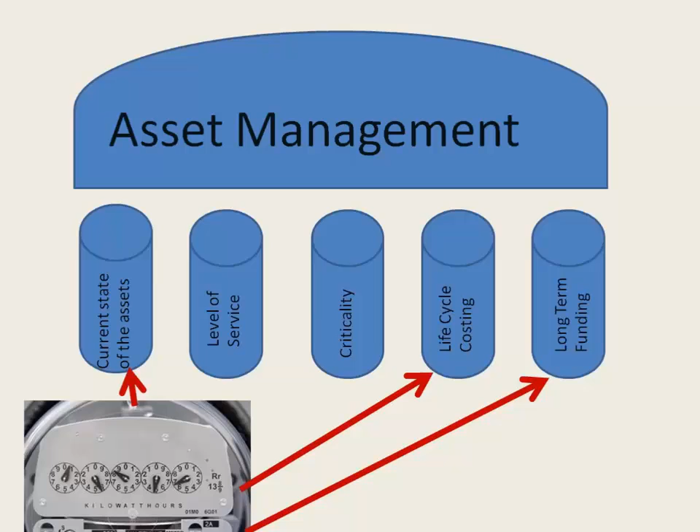One of the things we do as well is energy efficiency, and energy efficiency ties very directly to asset management. As you're doing your asset inventory during the current state of the assets, you'll collect information about the energy use of your assets. Then when you get to the life cycle costing segment, determining what you want to do when you want to replace an asset and what you want to replace it with, energy efficiency comes back because you're going to look at whether you want to replace an existing asset with something that may be more energy efficient. Finally, energy has a big impact on the funding required because energy is oftentimes one of the most expensive components of your system.

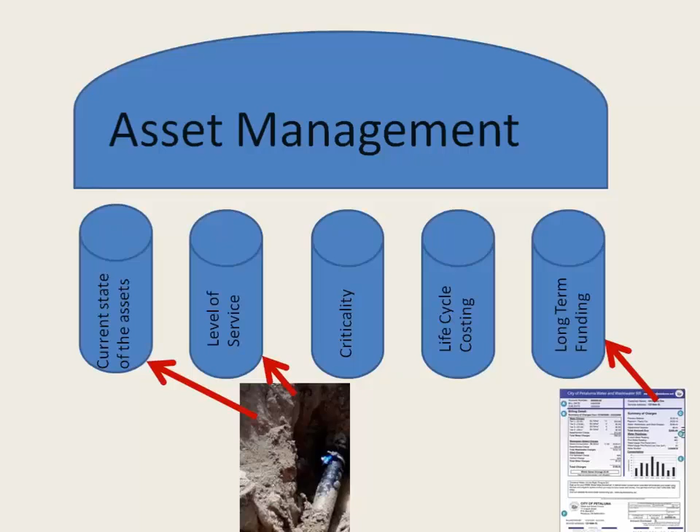When we get into water loss, which we are also going to talk about today, that has a direct impact on the condition of the assets, which is part of our current state of the assets. It has an impact on level of service because we may set goals for how much water loss we will find acceptable. It also has an impact on funding because if we're producing a lot of water that we're not selling, we have an expense, but we're not receiving the revenue from that.

Another very big aspect of our work is rates and fiscal planning. Much of the revenue for water systems comes from fees and charges to users, so it's very important to know how to set those rates because that will have a big impact on the funding available to do all the other parts of asset management.

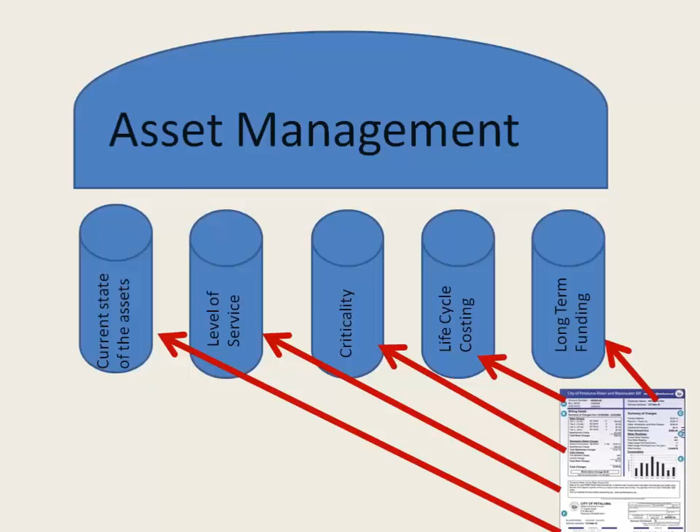Finally, I'd like to talk a little bit about water system cooperation. When water systems work together, it can help them in a lot of different ways, and cooperation can be anything from just talking to each other up to sharing operators or bookkeepers, sharing management, to the other end of the spectrum being actually interconnecting with somebody else and forming a new water utility.

If systems use cooperation just to help work through asset management alone, it can help you get through all 5 core components. You might not have any other connection with the system, but you might want to work with them and say, let's work through an asset inventory together, or let's look at how you set level of service goals. So look to each other to help out in that area.

Energy efficiency and water loss are very directly connected as well. When we produce water that's leaking out of the pipe, we have to use energy to produce that water. So if we can cut down our water loss, we will cut down our energy use.

Energy efficiency and water loss management are the two most controllable costs that go into our rates. So if we can reduce those costs, it can help us by allowing us to have money for other things, or help us out with the rates.

Small systems don't really have the economy of scale that a bigger system has. So it's important for us to look for ways to achieve that economy of scale, and one of those ways is by working together. I mentioned several ways that systems can work together. If you find a way to work together, it can help you reduce your overall cost.

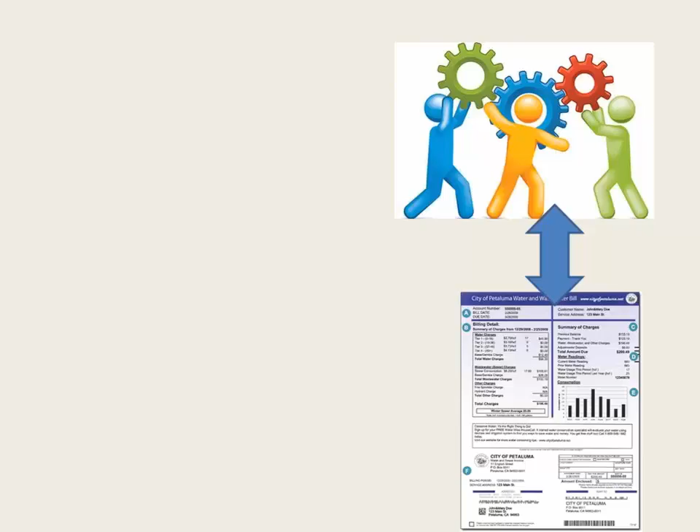So back to today's topic. Today's topic, we want to look at aging infrastructure with specifically a focus on the impact on water loss.

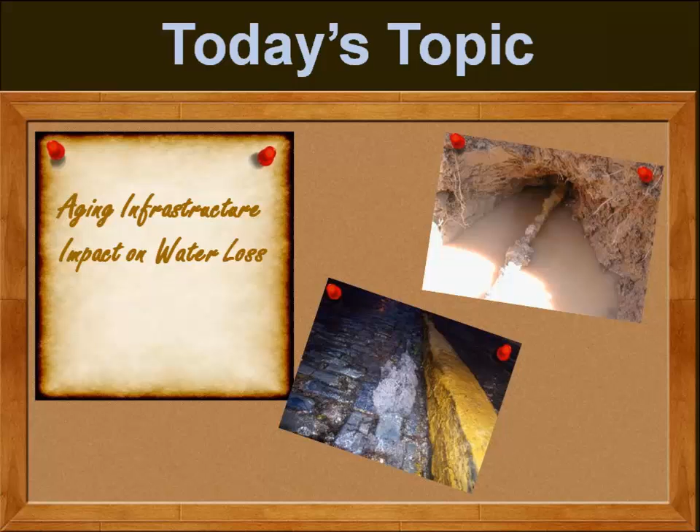So a quick review of webinar 1. What do we want to think about when we're talking about aging infrastructure? One of the things that we talked about last time, which is very important, is what do we really mean by the term aging. We want to get away from the thought that all we're talking about is how old a specific asset is, because age is but one factor that determines the condition of an asset and what you want an asset to do.

So we really want to get beyond that and think of aging infrastructure as really when our assets are starting to reach the end of what we call our useful life. And we'll talk a little bit more about useful life in a moment.

We want to look at our systems not as an entire combined holistic system. In this case, we want to look at individual assets and how those individual assets are performing. So again, when we get to our useful life, we want to look at the useful life of individual assets and not looking at a whole system, or even a class of assets together, like all hydrants, because they're not all going to act the same or last the same amount of time. So we really do want to get down to individual assets.

We want to think about all of our asset classes. Oftentimes when we think about aging infrastructure, it's discussed in the context of just our piping assets. We really want to think about all of our assets, vertical and horizontal. Horizontal assets are those assets in the field, like your pipe, your hydrants, your tanks. And vertical assets are those that are your pumps, your wells, your treatment units. We want to think about both of those.

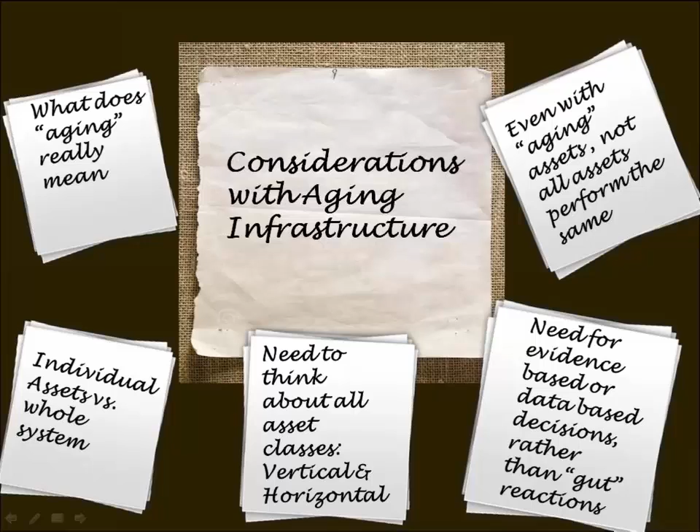Getting back to useful life, what we're trying to say is how much longer can that asset remain in service and deliver what we want it to do. The kinds of things we think about are the condition of the current asset, what it's made of, how it was manufactured, the maintenance history, usage history, etc. All of these things go into having a guess as to what the useful life is, and it will be our best guess because we never can know exactly to the moment when an asset is going to fail.

We want to do a best guess of what that's going to be, and we'll tie it to risk. If it's an asset that's very important to us, meaning the consequence of its failure would be pretty high, and the probability of failure is pretty high, it's something that would really cause us significant problems, we might underestimate the useful life. Instead of guessing 50 years, maybe we make it 45 or 40 years because we don't want that failure to occur.

If, on the other hand, the asset really doesn't matter, if it fails we can fix it, it's not a huge problem, then we would maybe stretch the useful life a little bit longer. So instead of saying 50 years, maybe we go 55 or even 60 years. We're making these estimates, our best guess based on all the information we have available, and maybe we'll be a little more conservative if it's a high-risk asset and a little less so if it's a low-risk asset.

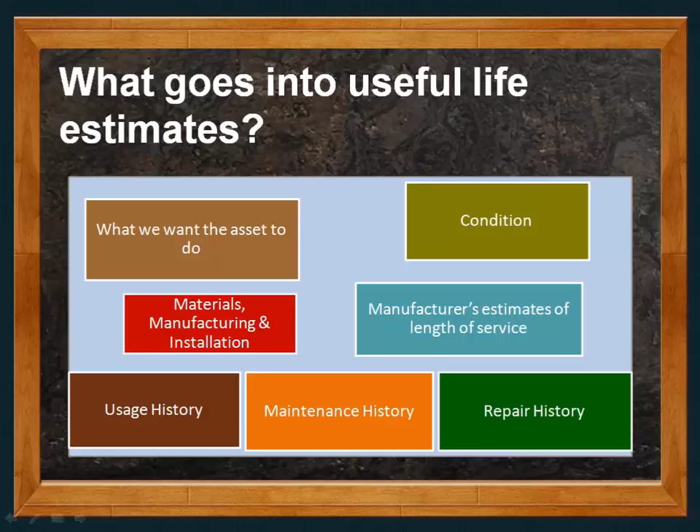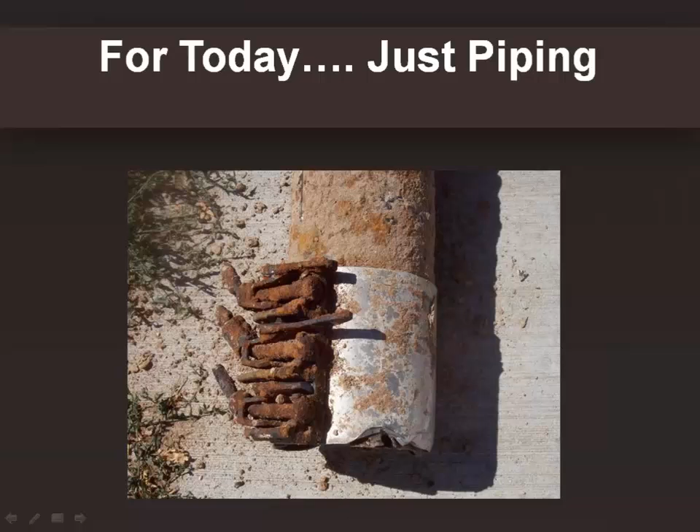For today, we want to concentrate just on our piping system and just looking at distribution piping. So I'll bring back this useful life estimate of piping, and what we're going to talk about is two things. One is what we want the pipe to do, and the other is all the rest of this stuff and how that impacts the degradation or aging of the pipe.

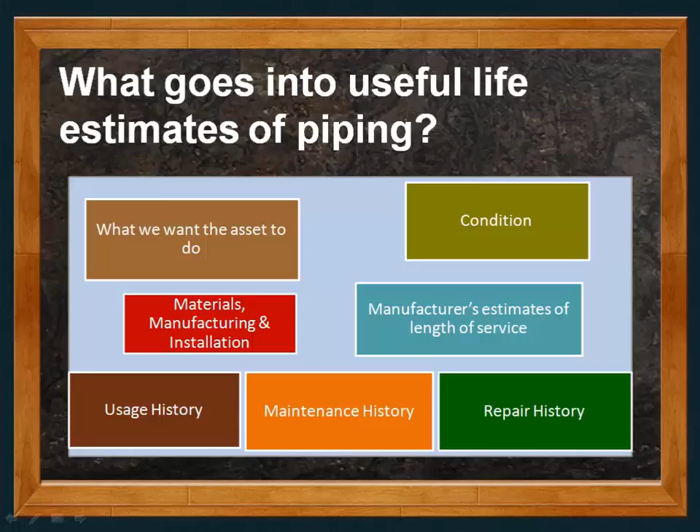So when we have pipe, what might we want that pipe to do, or how might we want to set a level of service for our pipes? We might want to look at things like the number of breaks per mile, or the number of breaks per segment, however you want to break that up. We might want to have a value and say we'll accept this many breaks per mile or per segment, but we really don't want any more, and if a pipe reaches that level, maybe that's the point where we need to replace it.

We might want to look at things like the number of service interruptions, either per customer or per year, to see how much we're shutting people off. We might want to look at the amount of real water loss and set a value saying we're only going to accept so much water loss. We might want to have a number of catastrophic breaks - meaning not just water flowing down the street, but something that causes a lot more problems, like a major sinkhole, a road collapse, or a problem for a business. So when the break has a much bigger problem than just a typical main break where some water runs down the street and we can fix it.

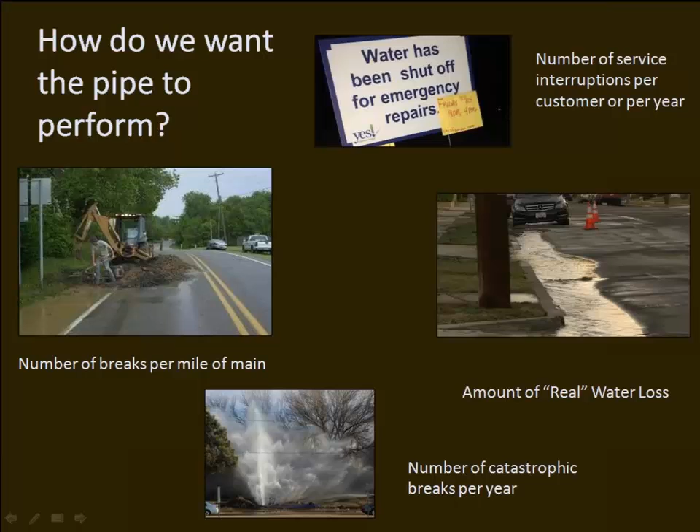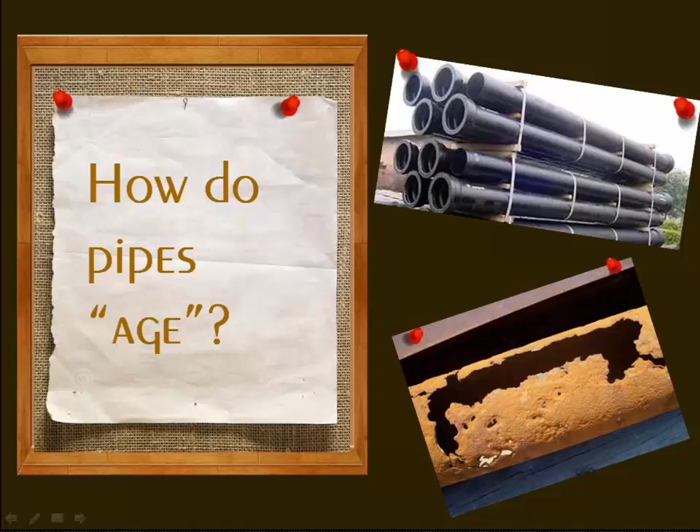All the other factors I'm going to lump into: how do the pipes age? How do they degrade? How do we get from a brand new piece of pipe to one where there's been a lot of degradation, holes, missing pieces of pipe? How do we go from one state to the other? There are a lot of factors that go into that, and I've separated them into three different categories. The first category being physical.

The major factors affecting deterioration are age, length, material, diameter, manufacturer, joint type, the vintage, lining and/or coatings, how deep the pipe is buried, installation, and wall thickness. So all of these physical factors that make up the pipe will affect its deterioration.

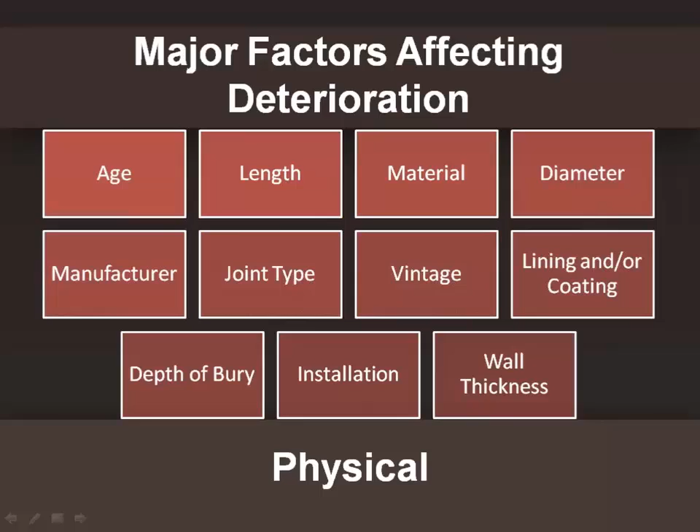The next is operation and maintenance: the break history, cathodic protection, whether you've protected the pipe, and water quality inside your pipe. Repair and rehabilitation methods, the flow velocity through the pipe, what kind of O&M you do, like do you do any flushing of the lines, do you do any cleaning of the lines, how are you operating your hydrants? Is there any water hammer if somebody's not doing it properly?

And then finally, the internal water pressure. What is that pressure inside the pipe? And does it vary? Is it something that goes up and down a lot, or is it pretty constant?

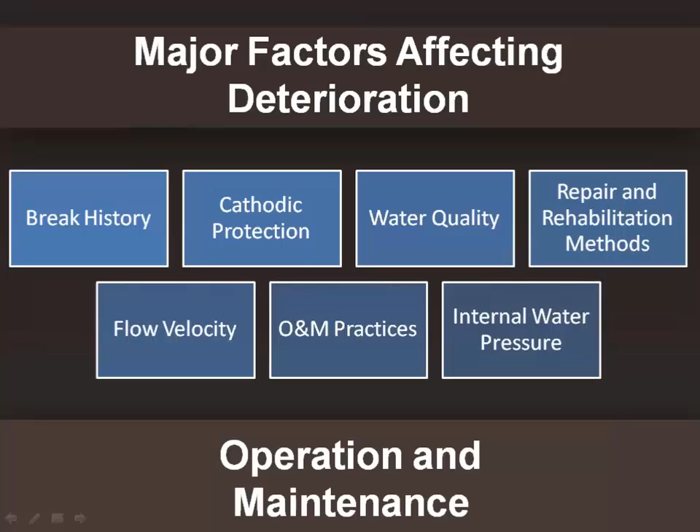And then environmental factors. These are the things affecting the pipe from the outside: the surrounding soils, frost, traffic loading, and the quality of water outside the pipe. So if this pipe is subjected to groundwater, what is the quality of that water? The bedding that's under the pipe or the backfill above the pipe.

If there's any stray electrical currents from other utilities around the pipe, if there's any underground disturbances, meaning construction going on near the pipe, and finally, the climate it's subjected to. Like here in Albuquerque, where I am, it's desert conditions, relatively mild. If you're up in Buffalo, you're subject to very cold and snowy. If you're in Washington State, different climate. So all of these factors add up to affect the pipe.

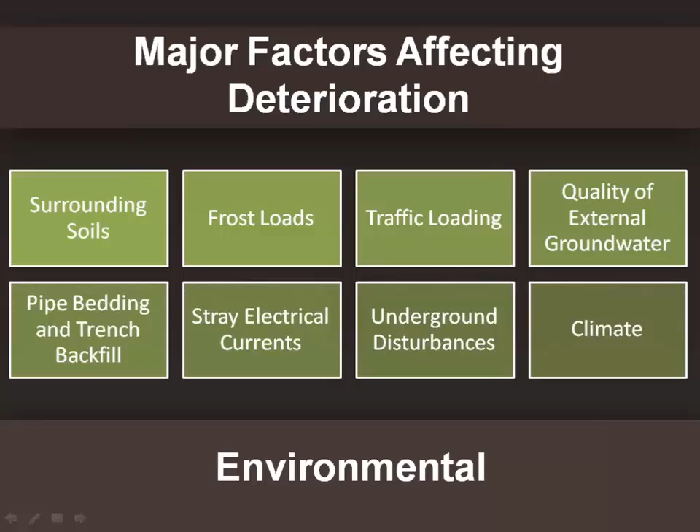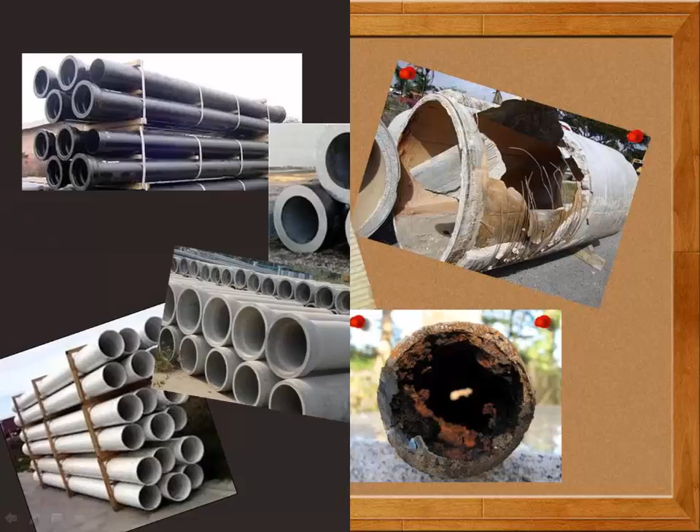And furthermore, within your system, each individual piece of pipe is going to be subjected to different conditions, so that's going to affect how individual pipes deteriorate. The deterioration can be internal or external or both. The forces acting on the outside of the pipe can have it degrade from the outside in, or the forces acting on the inside of the pipe can have it degrade on the inside out.

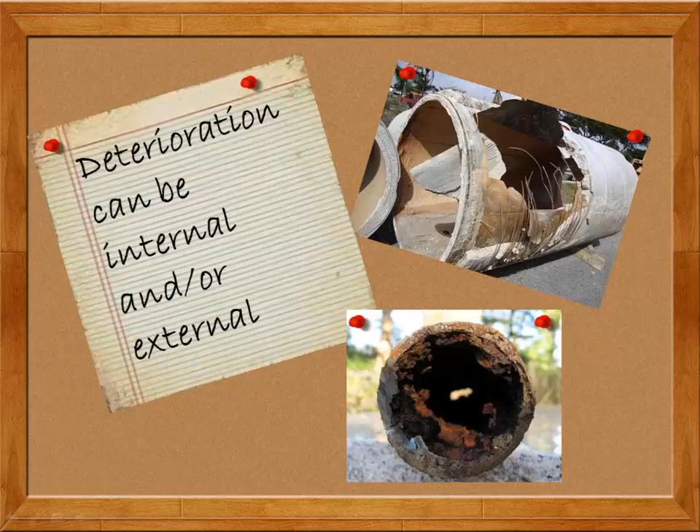The problem is that we don't really have a good way to determine the condition of this underground infrastructure. It's not possible for us to see inside and outside the pipes all the time. We may get a glimpse of a pipe during a repair, but generally speaking, we don't really get to see the inside of our pipes or the outside of our pipes.

As we just discussed, there's a really complicated mechanism for deterioration - all of those factors that act on a pipe. So it's very complicated to figure out how each of those factors is going to affect the pipe. And the deterioration is very site-specific, and it's hard for us to study it in situ, meaning in actual ground conditions, because it's hard to see what's actually happening. So for all these reasons, it's not that easy to determine the actual condition of your underground infrastructure.

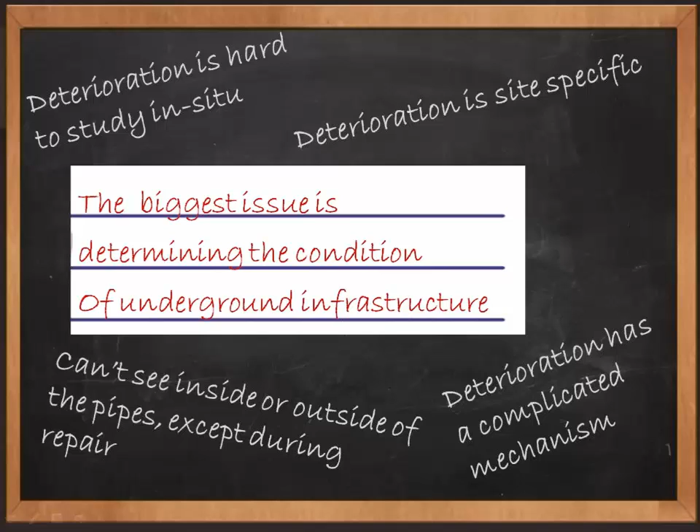There are some technologies that will help us get a better picture of what's going on in our pipes. There are several of them. Some are devices that you put inside a pipe, and some are devices that stay outside the pipe and you just hit a connection point, and you can figure out different things like wall thicknesses. Some can take videos of the inside of a pipe. Some can check for leak noises or look for leaks.

The problem is these technologies tend to be pretty expensive to deploy. They take skilled workers to put them in. They take a group who can analyze the data. Sometimes you have to build insertion points to put the devices in the system. So one issue is that for very small systems, this is not going to be something that you're going to want to do because it's going to be too expensive.

The results are also dependent on the technology you use, so you'll get different results depending on what technology you use. It's not like all of the technologies provide you the exact same data - some do different data than others. And then there's converting the results into actionable information. So once you know the condition from this evaluation, what do you do about it? How do you translate that into exactly when you should replace the pipe? Sometimes that's not as easy as we would like.

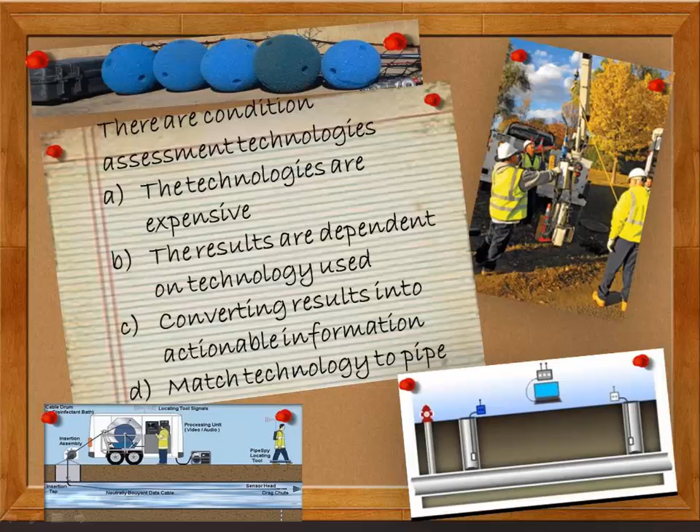So if we don't really have a way to get inside the pipes and find out what's going on, what else can we do? A lot of what we're going to do is rely on the past performance and use whatever we know about the pipe, things like size, type, diameter, depth of bury, and the other factors we talked about in the first couple of slides. We can know soil characteristics too.

So what we want to do is really get good information. Every time a pipe break occurs, we want to get really good information about where it was, what the pipe size, type, and diameter were, any other information about that break, what kind of break it was—circumferential, crack, pinhole—what did the pipe look like on the inside and outside, what did the bedding material look like.

So you're collecting your external factors, your internal factors, getting all this information and start plotting your breaks on a map and trying to see what are the trends. Are there certain parts of your system where more breaks are occurring? What are the trends in terms of pipe type?

Sometimes one pipe type is performing very differently than another. What about a particular manufacturer of pipe or a time period of manufacturing? Where are your trends? That will help you figure out where your problems are going to be in the future.

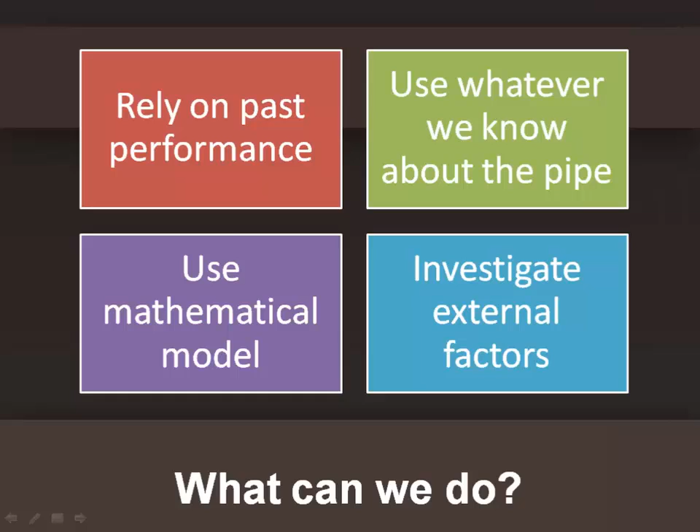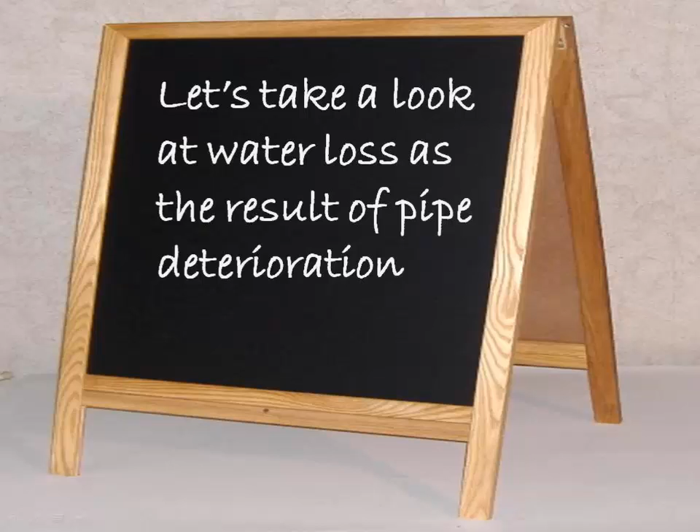So we've talked a little bit about pipe degradation and how pipes deteriorate over time based on those various factors we discussed—the physical, environmental, and operational factors. So one of the things that's going to happen as we get degradation is that we're going to start having some water loss. We want to focus on the actual water that's leaking out of pipes that have deteriorated, maybe with holes or cracks, and the water leaking out.

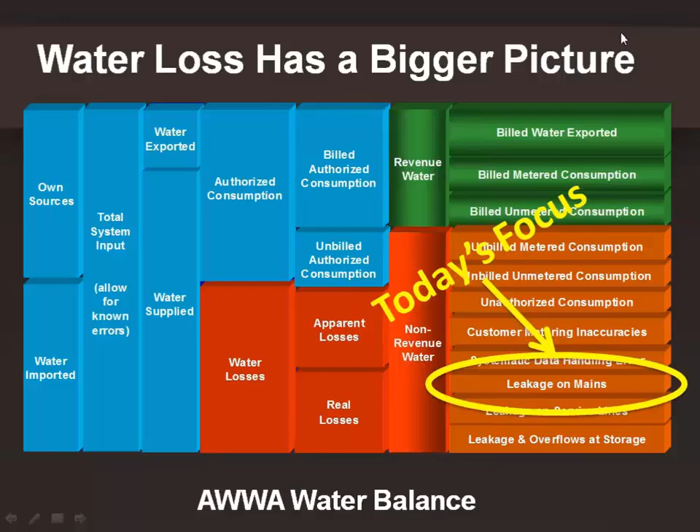As pipe deterioration increases, the number of breaks generally increases. As the pipe is wearing out, we're going to have more breaks, which will also increase the losses. So I wanted to ask a poll question to get a sense for the folks on the phone of how big of a problem water loss is for you.

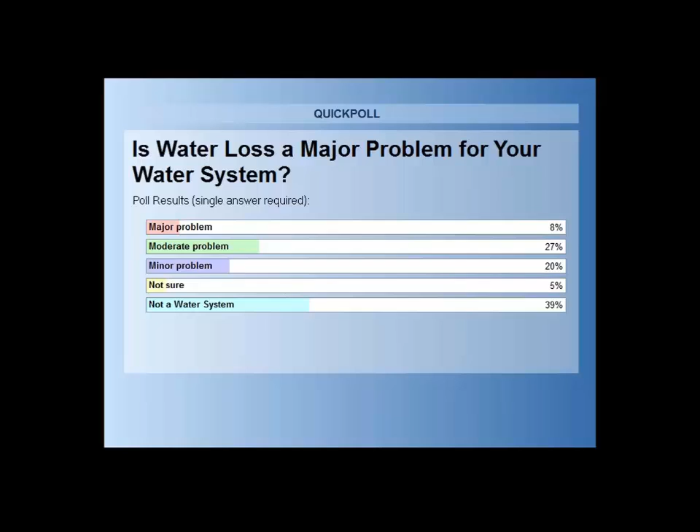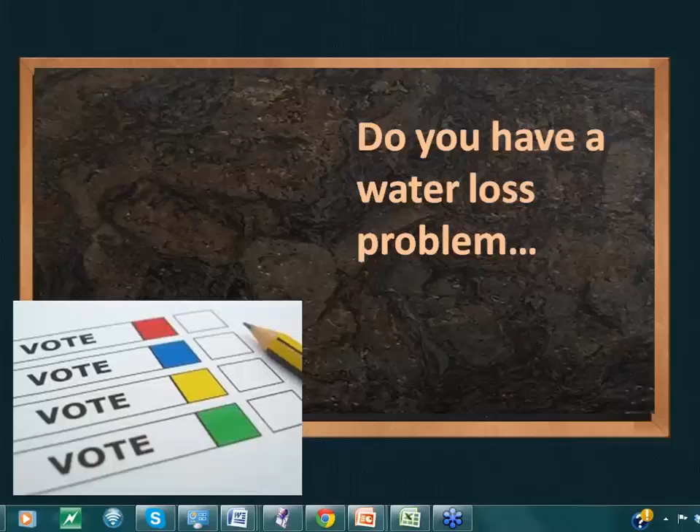When we have leaks in our pipe, we can sometimes find them because the water surfaces on the ground - we call that a surfacing leak. There are two kinds: water that flows gently over the ground, which is how most breaks appear. Water leaks out of the pipe and surfaces through some opening, seeking its easiest path, flowing down the side of the street, so we know there's a leak. We don't know the exact location, because the leak can be far from where it's surfacing, but at least we know in general where it is and can go find and fix it.

Surfacing flows can also be more of a geyser, where water shoots up out of the pipe into the air. These are not as common, occurring when the pipe is under higher pressure or in other situations that cause that kind of flow. With the geyser type, we need to get out right away and do something about it. With the gentler ground flow, we have a little more time to deal with the problem.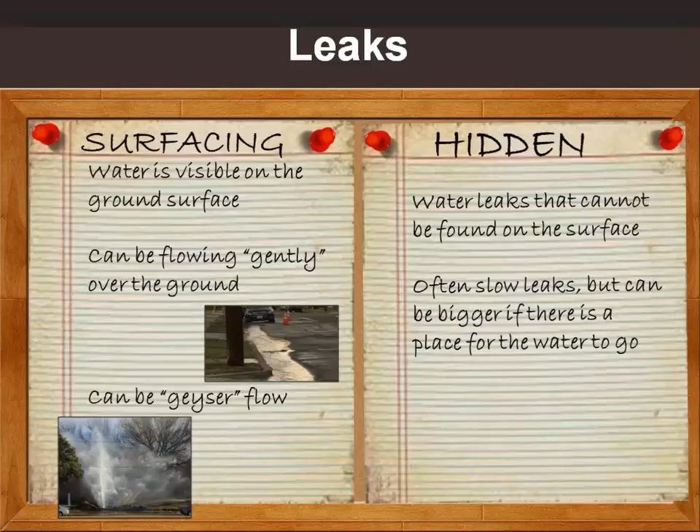The other types of leaks are ones we can't find because they're hidden - under the ground where the water hasn't surfaced. Some leaks are difficult to find because of where they are, the soil type, and other reasons. Sometimes there's just a small leak we can't find. The problem with hidden leaks is that if they go on for months or years, we can lose quite a bit of water through those small leaks. Even though geyser flows lose a lot of water quickly, a small leak stretched over a long time will lose even more. So we really want to think about what we're going to do about the leaks we can't find.

There are two ways to find these hidden leaks: actively go look for them, or wait until some catastrophic event occurs - which might be years later, as it eventually degrades the soil around it or causes a major burst in the pipe. So you're losing a lot of water in the meantime if you don't look for your leaks. Finding leaks early can help prevent a catastrophic failure and reduce your water loss.

We actually did a study once where we left a very small leak go for close to a 2-year period and never saw anything on the ground whatsoever. We eventually decided we couldn't really wait anymore, and we did fix the leak. But it is something where you can have these hidden leaks, and they can go for quite a long time.

There was another leak where a water pipe had actually bored a hole in a sewer pipe that was down below it, and the water was running from the water pipe into the sewer pipe. So until we had maybe a catastrophic event where the sewer would eventually fail because there was now a hole in the top of it, maybe we would have found it that way. But by looking for it, we were able to fix it before that became a major event.

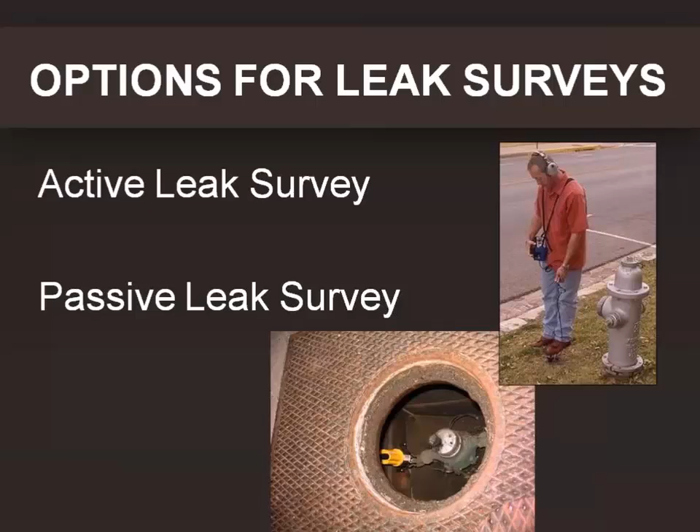There's two options to look for leaks. You can do an active leak survey where somebody's walking around with listening equipment, listening to hydrants, valves, meters. And the other way is a passive leak survey where you put a device in your system. It could be on a meter or a valve box.

So when we have an active survey, you could hire somebody to go through your entire system, survey all the hydrants, meters, valves, and let you know where they have heard leak noises and where they believe there are leaks. You can even buy your own equipment and get trained up on how to use it, but it's the kind of thing that if you don't do it a lot, you'll lose that skill.

So if it's something you're going to do very seldom, you probably want to hire somebody to come in and do it for you. If it's something you think you'd use a lot, then it might be worth investing in the equipment and getting the training.

In addition to surveying the entire system, you can also survey part of the system. So if we go back to gathering data about what's going on in your system, and if you have a map of where the breaks occur, or some idea of what portion of your system is causing the most problems, you can choose to survey those portions of most concern and not bother with the rest. Save yourself a lot of money, but get most of the data that you need.

So if you find out that, say, 75% of your breaks is in maybe a third of the system, just survey that third, and you'll catch most of what's going on at a fraction of the cost. You can also do a sampling of the system where you might choose to check a little bit of each pipe type, see what you find, and then choose how to go on from there. So there's a couple different ways that you can do an active survey.

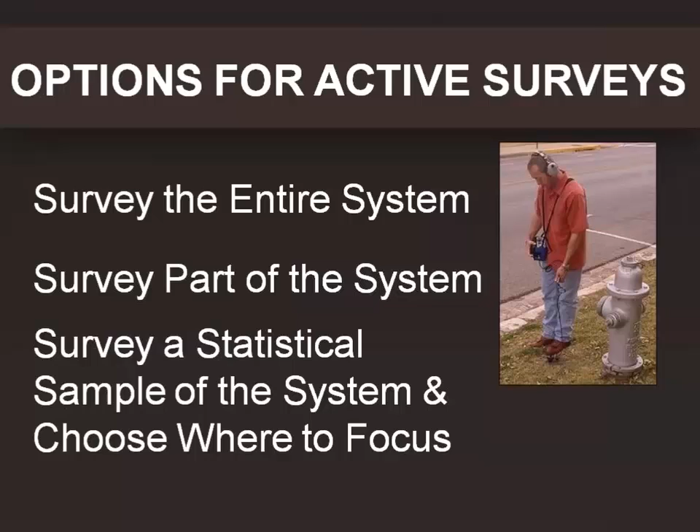A passive survey is where you get some kind of device that listens for leaks at night and then provides you data either electronically to your computer, or you drive around with a gadget that collects the information and tells you it's heard a noise. Most of the time, they can't tell you it's specifically a leak noise, but they will say they heard a noise, and you can investigate to see if it truly is a leak or not.

You can either do a full deployment where you buy devices and put them throughout your system, or you can do what we call lift and shift, where you buy a few devices and keep moving them around the system. And then there's combinations of doing a partial deployment and a partial deployment with lift and shift. So there's a couple different options.

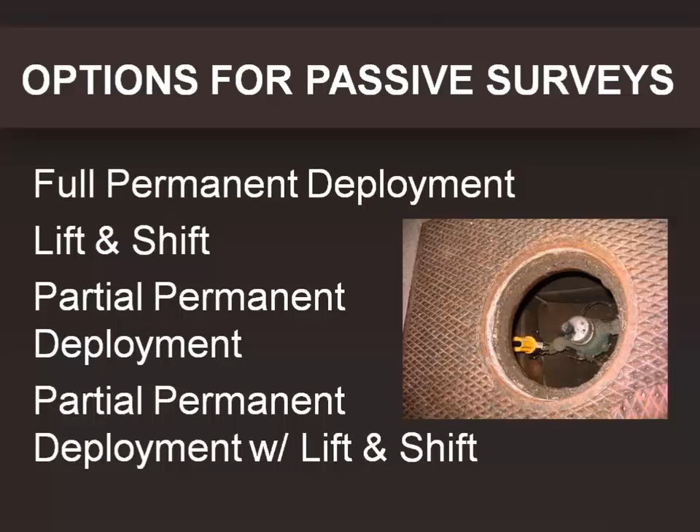Thinking about active versus passive, some of the considerations in choosing is the cost of devices. Those little listening devices cost money, and how much do you want to invest in those devices versus buying equipment, getting trained to do an active survey, or the cost of hiring somebody to come in and do that.

What type of pipe do you have? How much water loss do you have? All of these kinds of factors go into whether you're going to pick to do an active or passive survey, because not all the techniques work on all pipe types.

You need to know how many contact points you have, and a contact point is something like a hydrant, a valve, a meter, a place where you can gain access to the underground system. When you're listening, you have to have a device that can connect to the water lines down below, and it connects through items like a hydrant, a valve, a meter. So if those points are very few and spread out far, it'll be much harder to hear leak noises. That can impact what you choose to do and how you choose to do it.

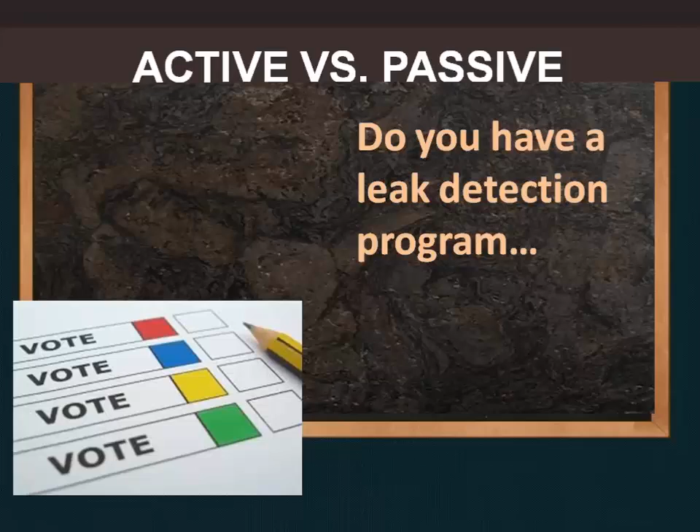Here we'd like you to answer yes if you're using an active leak detection, and again, this is a person who walks around the system and listens. Yes, using a passive leak detection, those little devices that are attached to your system. No, but we're in the process of starting one. No, and then not a water system. So take just a couple of seconds and take a moment to answer the question.

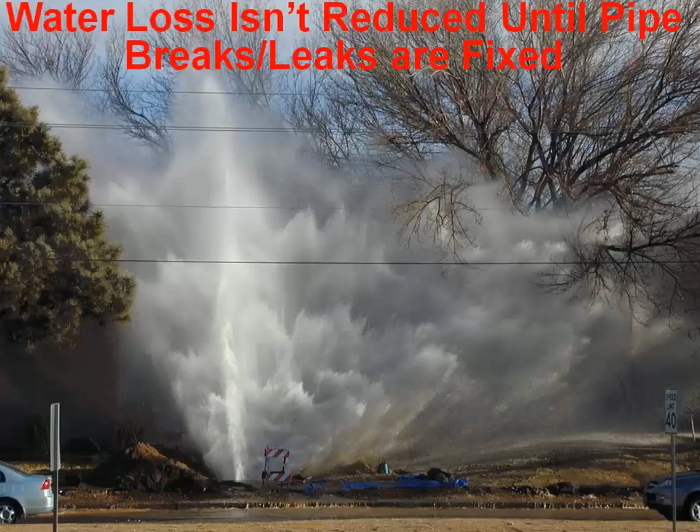The big thing with water losses, and this occurs when people get gung-ho about looking for leaks, we really need to keep in mind that we don't reduce any water loss until we actually fix the pipe or fix the leaks. So finding the leaks in and of itself is not going to stop or lessen our water loss. We actually have to fix the pipe.

So we have a couple different options about what to do when we find a leak. One is to just leave the pipe in place and fix the leak, so put a clamp on it or something like that, where we're leaving the pipe in place, we're just stopping that leak. Another option would be to replace just a short segment of pipe, like maybe 5 feet or 10 feet of pipe, so we're leaving the rest of the pipe in place, but we're just going to splice a small portion of pipe in there because maybe the break was too big to put a clamp on it or something of that nature.

We can also replace the pipe. We can replace it with the same type of pipe, or we can replace it with a different type. So if it's metallic, we could use plastic. If it's cast iron, we could use a different kind of metallic pipe, like ductile iron. Or if it's PVC, we can just replace it with another PVC. Or if it's ductile iron, we could replace it with another ductile iron. So we can replace it with the same or different material.

And then finally, we have an option to maybe rehabilitate the pipe. This is way more common on the wastewater side than the water side, where on the wastewater side we have the ability to line pipe. There's a little less ability on the water side, but there may be some options for, say, pipe bursting, which is kind of a quasi-replace, rehabilitate option. And there may be some lining potential with some of the water pipe.

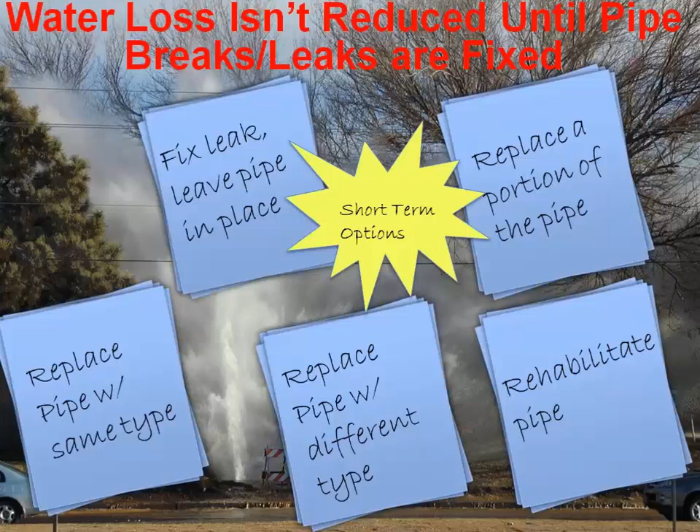So these are all of our options. In the first couple, fixing the leak and replacing a small portion are more short term; we're leaving that pipe in place, allowing it to continue to remain in service and reach the end of its useful life. The other two are more longer term, meaning that we're extending the pipe life and giving it almost like a brand new pipe life. So we have short term and longer term options.

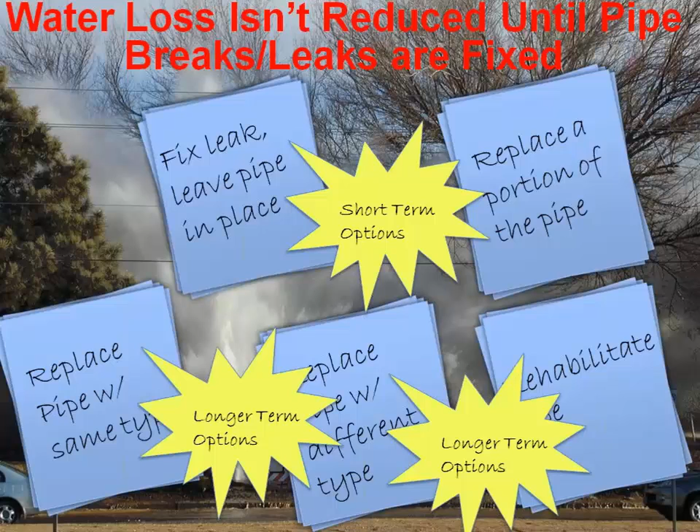In the short-term options, what we want to think about is, what's the underlying condition of the pipe? If the rest of the pipe seems to be in decent condition, then it makes a lot of sense to use a short-term option. And if the underlying structural integrity is there, it makes sense to do this.

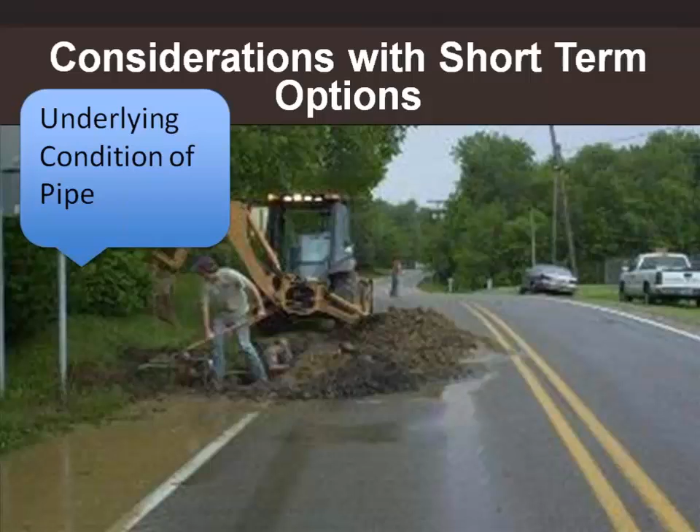If the pipe has almost no structural integrity, the condition is terrible, sometimes putting a clamp on it can just cause it to break somewhere else. I've seen pieces of pipe where there's almost nothing left but a series of clamps, because every time you put a clamp on, it causes it to break at another weak point somewhere else.

When you get to that point, it doesn't make a lot of sense to do a short-term option because you're not really extending the pipe life, you're just putting a Band-Aid on it. So we really want to think about what the pipe is actually like, whether it's worth doing a short-term option.

What's the life expectancy of the overall pipe? If you should have another 10, 20, 30, 40 years of life in that pipe, it makes a lot of sense to do some of these shorter term options. If really we think it's at the end of the useful life now, maybe it makes more sense to actually just replace the pipe.

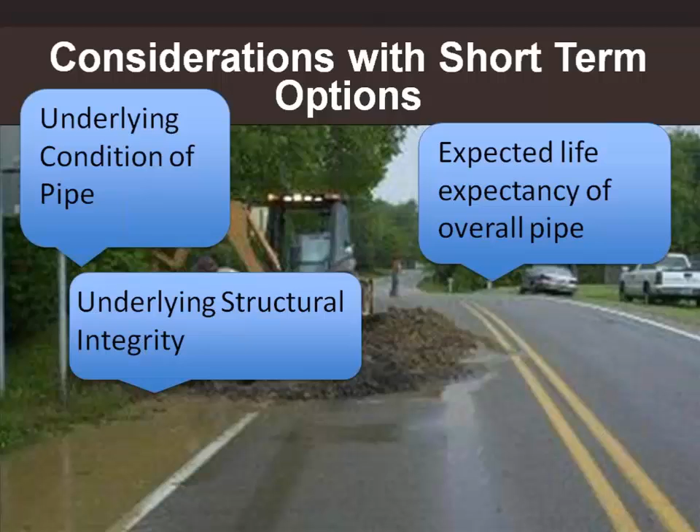We want to think about what's happening with the adjacent infrastructure, the roadways. Is that road going to be replaced sometime soon? If it is, then we probably want to think about replacement rather than a short-term option.

And then finally, what's our past break history? If it's been breaking a lot, that may make us choose to replace it versus doing one of these short-term options. No matter what, eventually all of our pipe will have to be replaced.

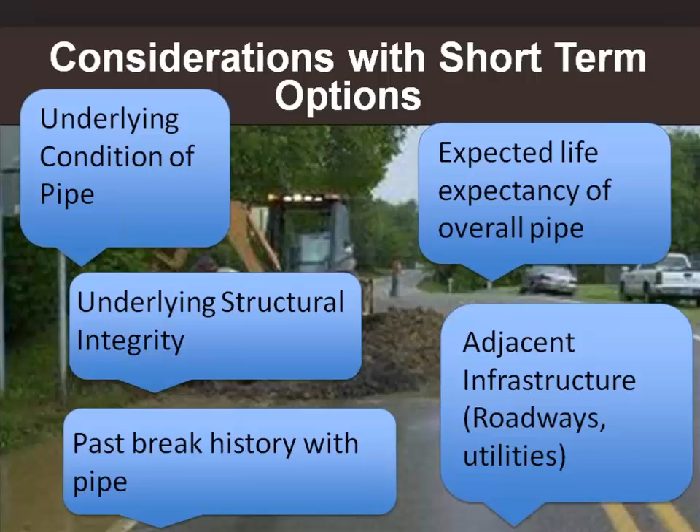We can stretch it out as long as possible, but eventually all of it is going to have to be replaced. So the period by which we replace it is called our replacement cycle. So how soon do we want to replace that pipe?

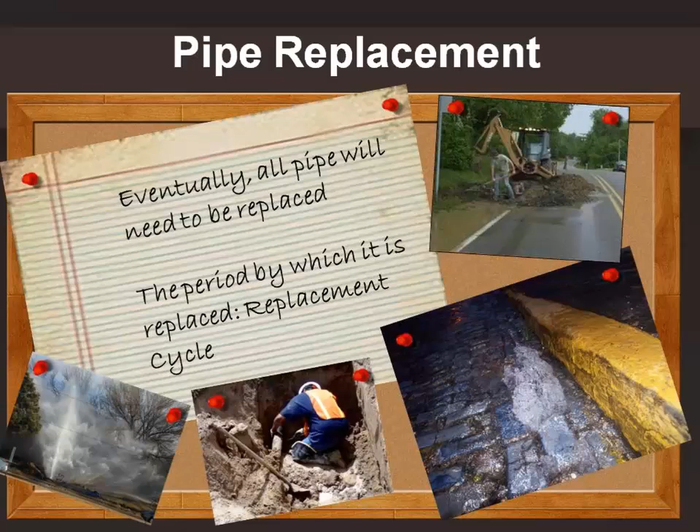So we think about when our pipe was put in, and for simplicity I've used decades instead of years. So our pipe went in installation waves. Your community didn't grow in exactly the same increments. It grew a lot and maybe fell off and grew some more. So you're going to see installation waves as you put in the pipe.

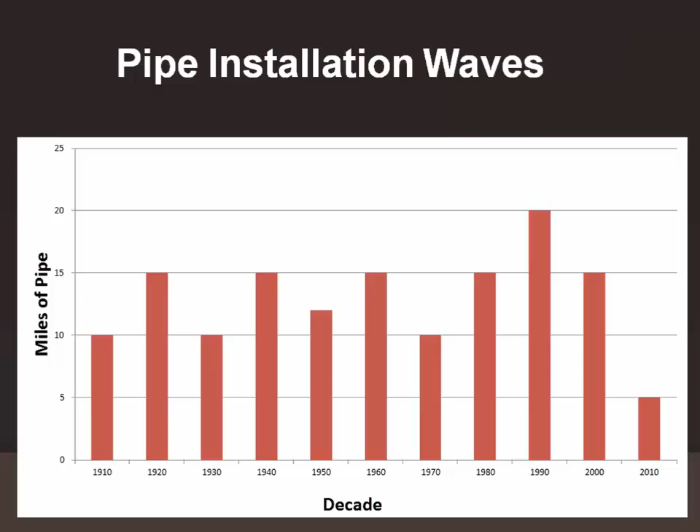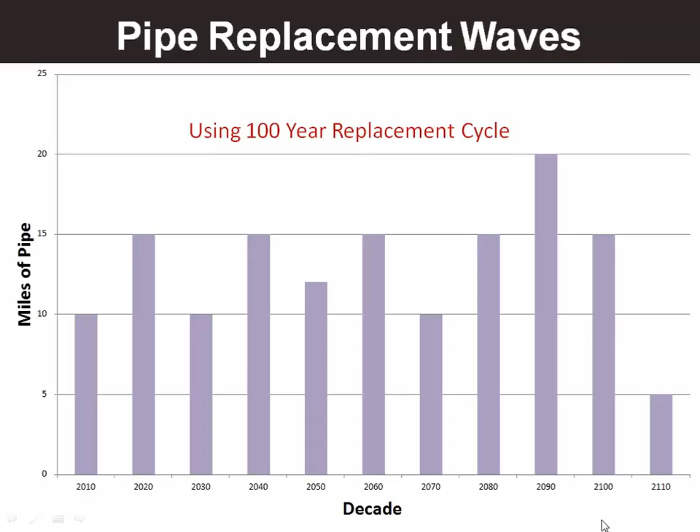That's typically not what we really see happen in actual practice for a couple of reasons. One is each one of those installation waves means different kinds of pipe types, different techniques of construction, different manufacturing techniques. So it's not like everything we put in 1910 is going to magically fall apart in 2010.

So what actually happens in 2010 may be stuff from 1940, 1930, 1910, 1950. I mean, it's going to be a whole mix of pipe, because some of the pipe from 1910 is going to last a long time, and some of it will need to be replaced.

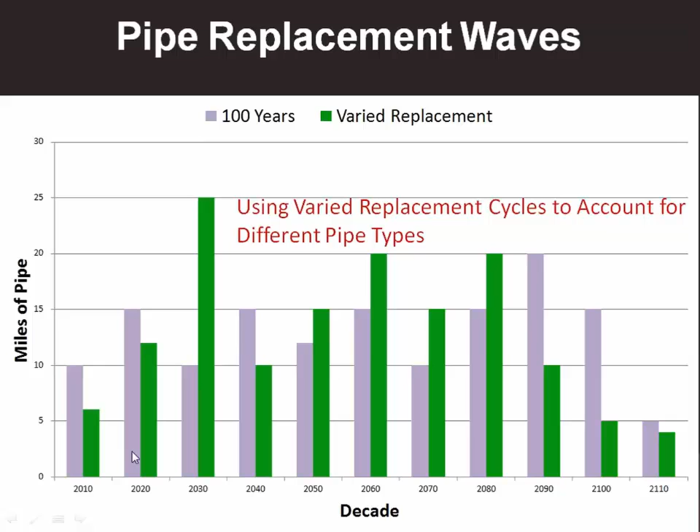And another issue with our actual replacement comes down to money. We don't really have the luxury of saying that we will replace every pipe 100 years from now. We are living in a world where you only have so much money and you have to decide how to spend it. So oftentimes pipe is one of the things that the money is not spent on. So as the money goes down, our replacement is going to change.

So if we look at our example, and I'm keeping this very simple, there's 142 miles of pipe in our example. I'm not going to assume any price inflation, and we're going to use a $500,000 per mile replacement cost. And that's kind of average. There are some of you that experience probably way higher, and some of you might have a little less, but that's not a bad number to pick.

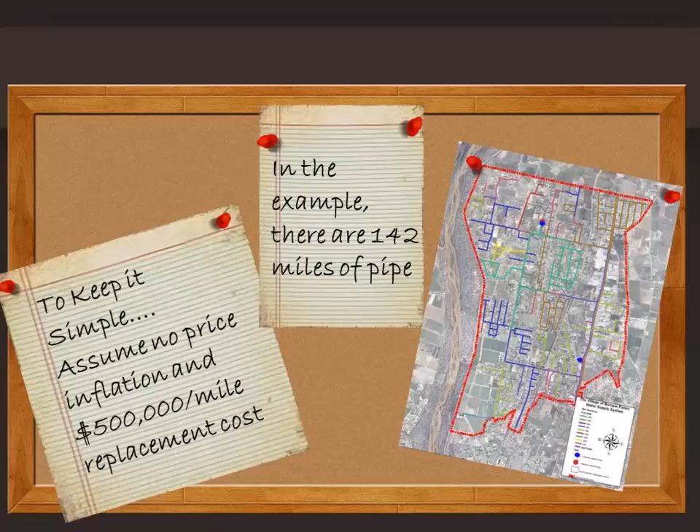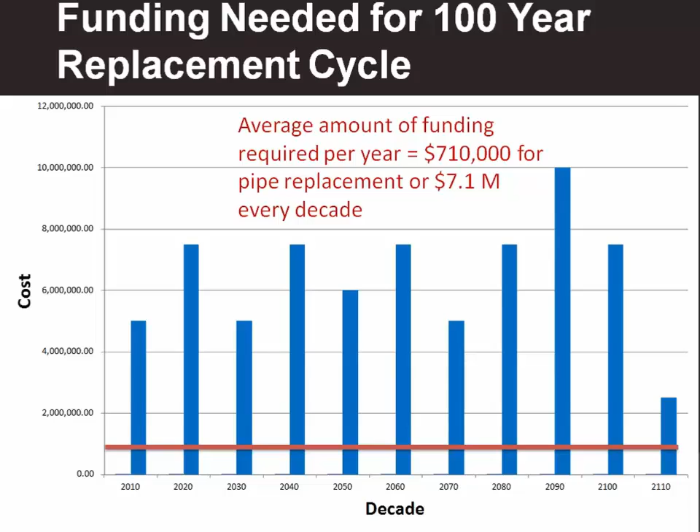And if you wanted to do a 100-year replacement cycle, you would have to spend $710,000 per year on average to do the replacement. Now, that doesn't mean you have to spend it exactly every year. You might choose to say, well, every decade I'm going to spend $7.1 million and I'll replace roughly 14 miles of pipe. But it has to, on average, work out to be $710,000 for you to hit a 100-year replacement cycle. So if you end up with less funding, say you only get $473,000, now we have a 150-year replacement cycle.

Or if we only get $355,000 per year on average, we have a 200-year replacement cycle. And again, what that means is there will be pipe in the ground for at least 200 years after it was put in. Some of the pipe may actually have to be in longer because some of the other pipe is not going to make it 200 years. So you can see how when you drop the amount you're willing to invest, your pipe has to be in the ground a lot longer.

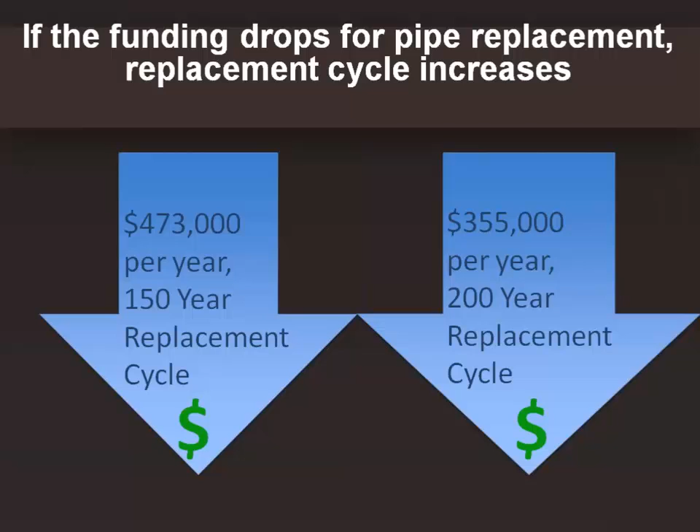So delaying that replacement cycle can really increase your water loss because you're going to have a lot more breaks, a lot more degradation, a lot more pinholes. So water is going to be leaking out the pipe, and it will have less ability to handle the pressures that you're putting the pipe through. So you're going to get more water loss, you're going to have more catastrophic failures, more customer outages, and increased energy use, because along with increased water loss comes an increase in energy use.

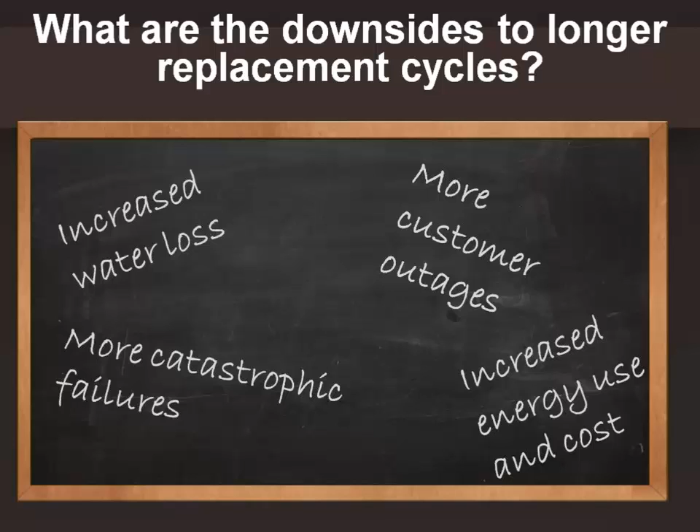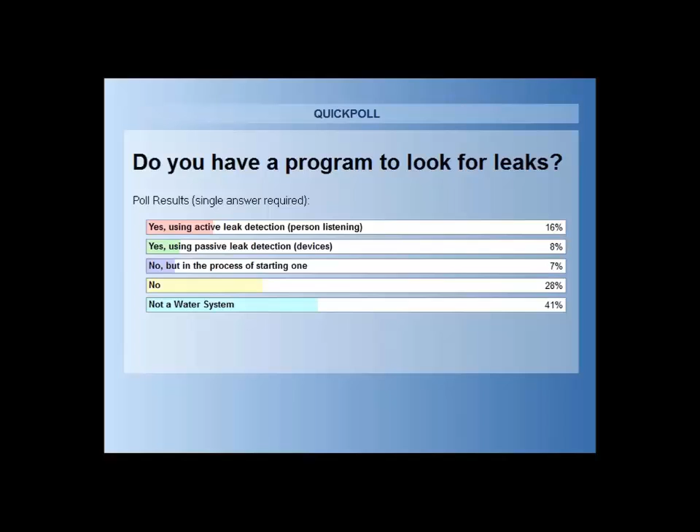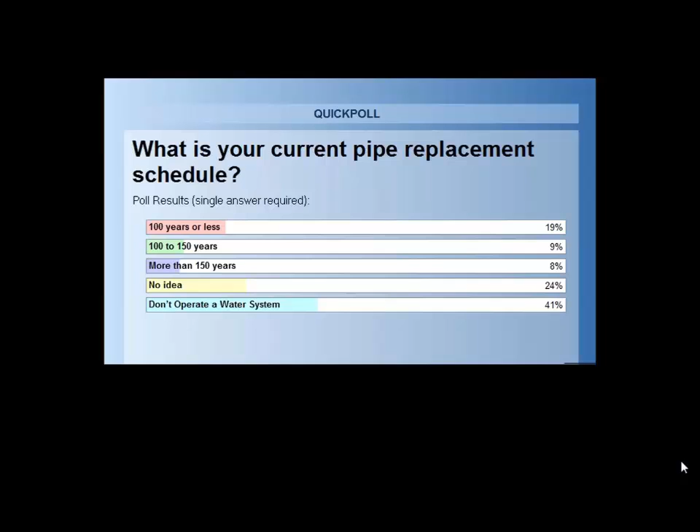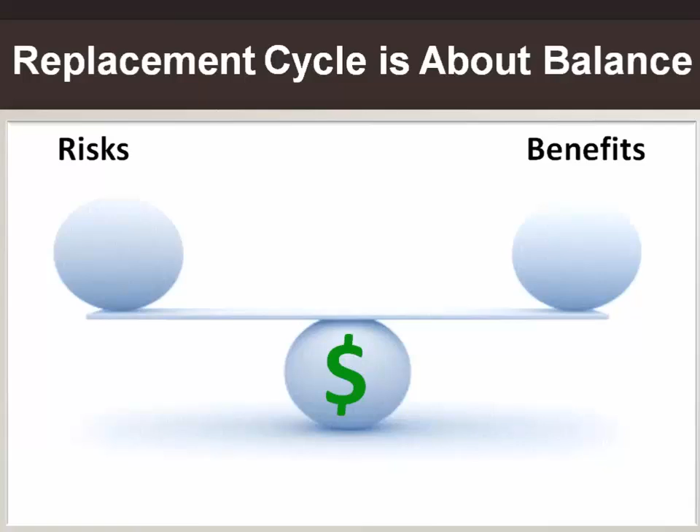So the replacement cycle is really about balancing the risks with the benefits and the money that you have available. So when you spend less money on pipe replacement, the risks of having greater water loss, more catastrophic events, more problems is going to go up, and the benefits are certainly going to go down. If you spend more money, the risks go down and the benefits go up. And I think it's really important for us to communicate this to our leaders, that when they're choosing what to invest in our water infrastructure, our pipe infrastructure, the connection between risks and benefits is very, very clear.

If you choose to have your replacement cycle be 150, 200 years, that's investing less money. And so your risks are going to go up. There is going to be more trouble in your system. So there is a trade-off. It's not like there's no price to be paid for investing less in your water infrastructure.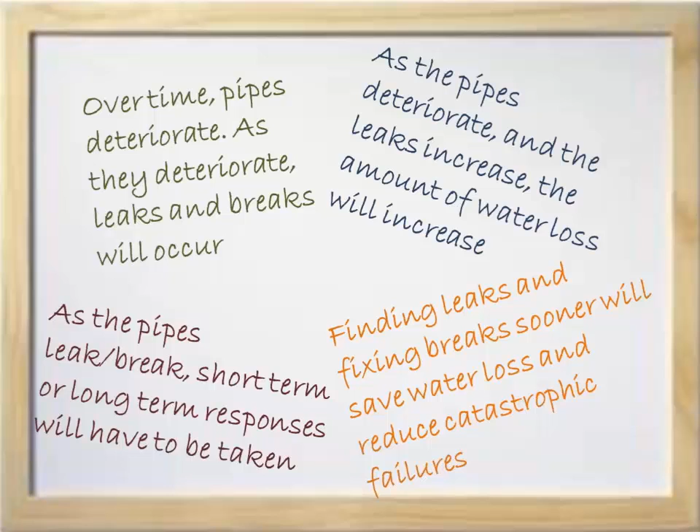So in summary, over time, pipes are going to deteriorate. As they deteriorate, leaks and breaks are going to occur. The leaks are going to increase, which will also increase the amount of water loss. We can offset that by finding the leaks and fixing the breaks sooner, because that's going to save water and also reduce our catastrophic failure, so it'll save us money. And then as the pipes break, we do need to take a short or long-term response. We either have to fix the leak with some kind of clamp or something like that, or we have to replace the pipe.

So finishing up with taking it to your facility, develop a team to help you, like operators, managers, whoever's there. Form a team to help you collect the data about your pipe breaks, have some help mapping it out, see how much information you can gain to get a better picture of your system, and then involve your finance people so you can figure out what that replacement cycle is for your pipe.

Assess your situation. Look at the information you have right now. How bad is your water loss? How many catastrophic breaks do you have a year, a month? How many other breaks do you have in your system? Where are they at? How big of a problem is it for you? Are you in the midst of a drought in which water losses are very important? Are you in a water-rich area where maybe a small amount of water loss increase isn't a problem? All of those things can enter into assessing where you are right now.

Determine if it makes sense for you to look for your hidden leaks, again thinking about some of the issues we just talked about. And then if so, on what portion of the system would you do it? What type of pipe would it work on? Where are you having your biggest problems? Where do you want to do that leak detection?

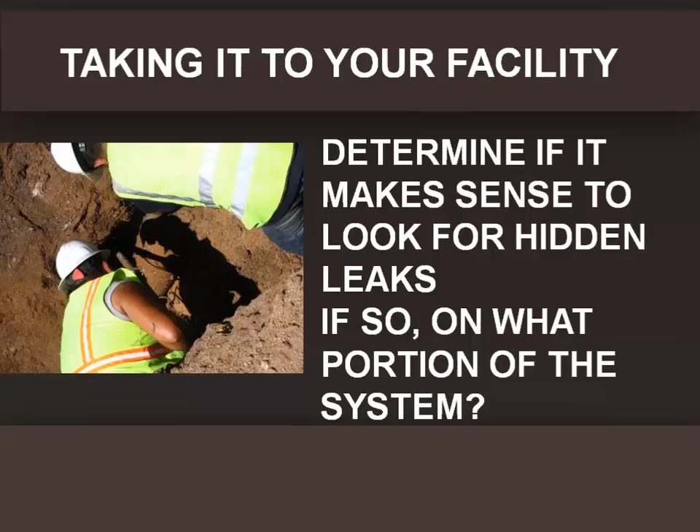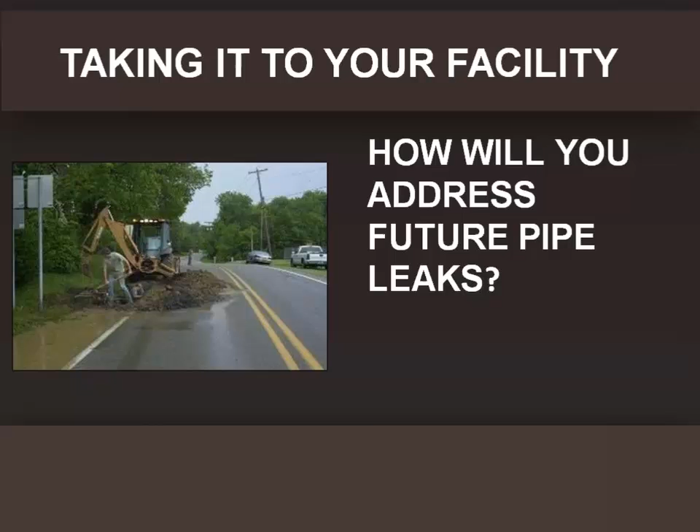And then how do you want to address your future pipe leaks? What areas might you want to actually do a pipe replacement? When might you want to use pipe repair? And then figure out your replacement cycle. Is it reasonable? Does it make sense to you? Are you carrying too much risk? Have you communicated the risk of having a long replacement cycle?